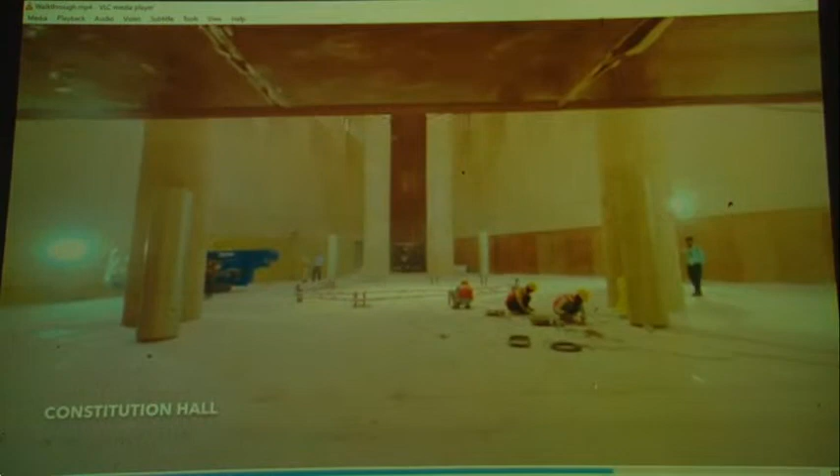Once you enter, here we have followed the theme of the lotus, which is the national flower, whether it is the false ceiling, the design, the jalis, etc. Then we come to the constitutional hall.

This walkthrough was taken when the construction was on. We were doing the finishing touches.

This is the MP lobby where MPs will sit, like in an airport lounge. They will sit here. It is a central courtyard. There were trees, so we have kept the trees.

This is the Gandhi statue in the old Parliament building, and this is the view from the old Parliament building. At night there is some facade lighting which will give this look.

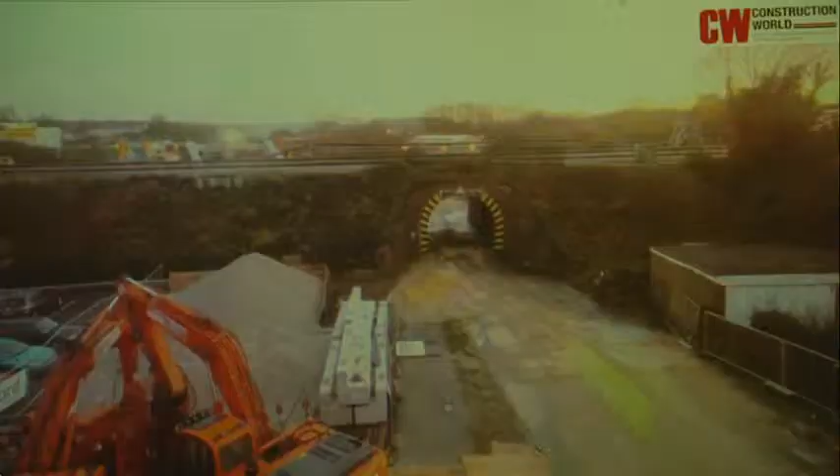So much has changed in our country in the last 100 years. We were able to break free of British rule, but some things they left behind stuck with us. Our Parliament building is one such legacy. The British designed the structure, the British laid the foundation, and the British inaugurated the building.

Now the central government has announced the construction of a new Parliament building, which the government says will honor India's cultural diversity and its journey to becoming the largest democracy in the world.

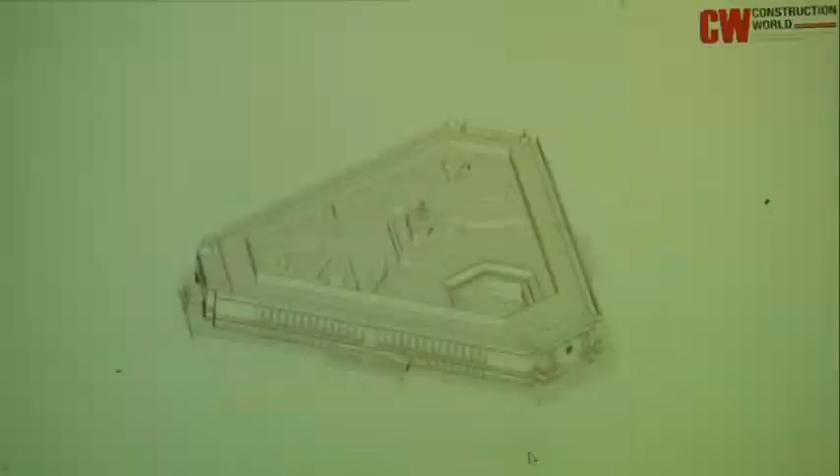The new Parliament building will be a triangular structure spanning an area of 64,500 square meters. A special feature is the Grand Constitution Hall, showcasing India's heritage and cultural diversity. This hall is said to honor the works of Indian artisans and sculptors as a symbol of Atmanirbhar Bharat, the new slogan of self-reliance from this government.

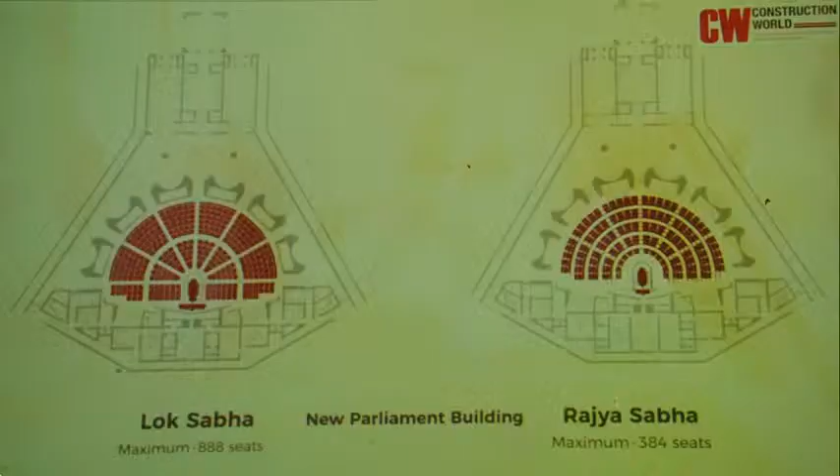A significant part of the change has been the growth in India's population, raising questions about adequate political representation. The seating of the new Parliament building has increased 1.5 times compared to the old building. Between the two halls, the building has a seating capacity of 1,272 MPs: 888 in the lower house, the Lok Sabha, and 384 in the upper house, the Rajya Sabha.

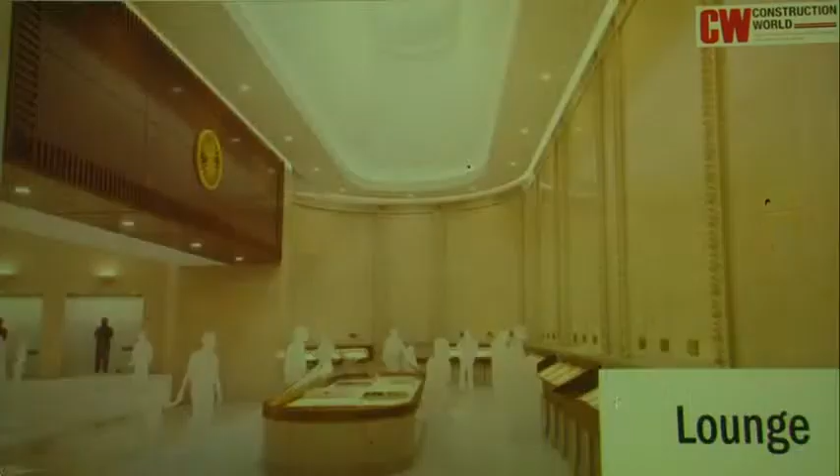The building will house lush amenities for the political representatives: a lounge, a library, multiple committee rooms, a dining area, and lots of parking space. The new building will not have a central hall like the old building, a feature that maximizes space.

As you would expect, the new Parliament building is eco-friendly and green. It is projected to consume 30% less electricity.

The project is in the hands of Tata Projects Limited and is estimated to cost 862 crore rupees. Tata won the bid and will build the new structure over the next year and a half, 21 months to be exact, with completion expected by July 2022, the year of India's Platinum Jubilee as the young independent nation turns 75.

On 10th December 2020, Prime Minister Narendra Modi laid the foundation stone for the project. With the groundbreaking ceremony, or Bhumi Pujan, the ritual to honor the land of construction, the building still needs court sanction before construction begins. This is the question we asked, and I am going to answer this.

This is a very important project for the country, the first Parliament building to be constructed in independent India, and it's a national emblem.

When we bid for this project, we bid a very aggressive price, and by the grace of God we became L1 and won the tender. We are very much confident that we will be able to complete this project on time with the required quality and safety. We feel proud to be associated with this project, both as a company and as an individual.

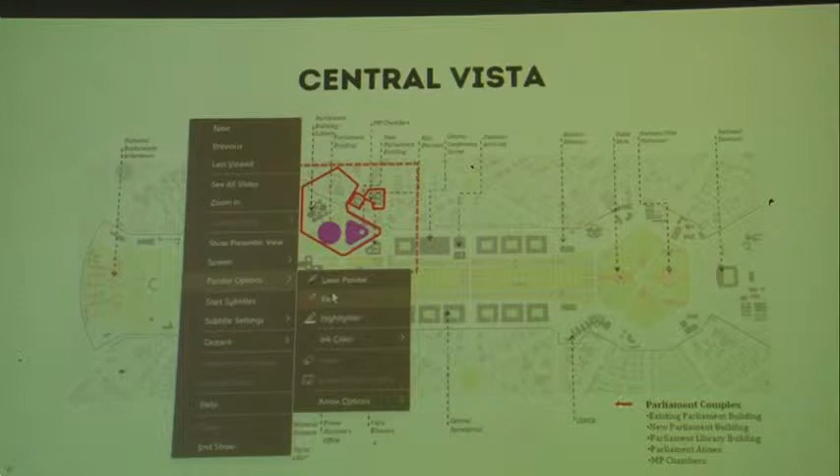Can you please switch off the light? Are you able to see my pointer? So this is, if you see this triangle, this is the project.

If you can see the entire development, our project is hardly 3 to 4 percent of the entire footprint. But there is a lot more, because this is a very ambitious plan of our Honorable Prime Minister. It's about 15,000 crores of estimated complete development, which has been designed by HCP, Hasmukh C. Patel, a design consultancy from Ahmedabad. Mr. Bimal Patel is leading that group. This is called the Central Vista plot.

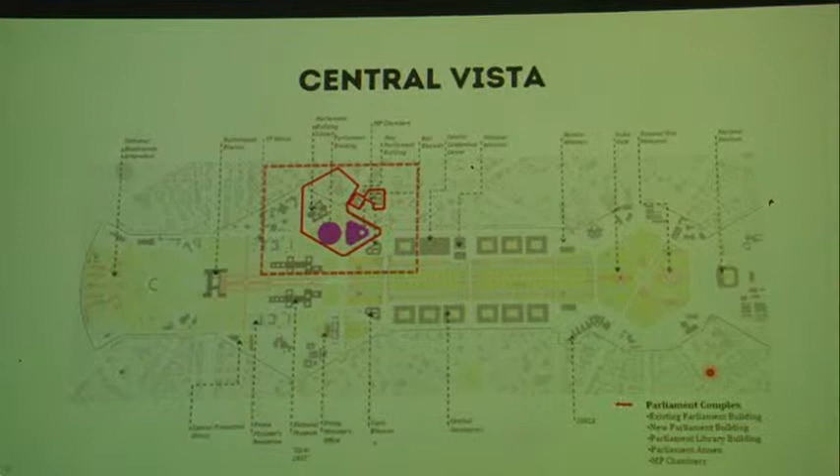This is the Parliament Library, this is the old Parliament, this is the new Parliament, and these are the different buildings that are going to come, some of which are already ongoing. About 4 or 5 projects have already started, including the Vice President's Bungalow, the Common Central Secretariat, and the Executive Enclave which has the Prime Minister's office and residence. Kartavya Path is also part of Central Vista, and that has been completed. We, as Tata Projects, are doing only the Parliament building.

I have a video for this also, which I'm going to play here.

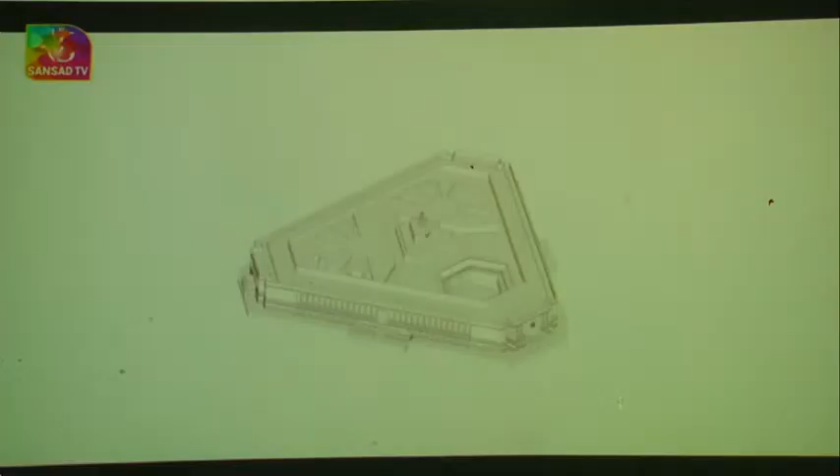संसद का नया भवन पुराने भवन से 17,000 वर्ग मीटर बड़ा है। संसद के नए भवन को 64,500 वर्ग मीटर क्षेत्र में बनाया गया है। संसद के 4 मंजिला भवन में मंत्रियों और पार्टियों का अपना अलग कमरा होगा। संसद का नया भवन टाटा प्रोजेक्ट लिमिटेड ने बनाया है। संसद का नया भवन पूर्ण रूप से भूकंप रोधी है, जिसका डिजाइन HCP डिजाइन प्लानिंग एंड मैनेजमेंट प्राइवेट लिमिटेड ने तैयार किया है। इसके आर्किटेक्ट विमल पटेल हैं।

So the reason for showing this video is just to compare old and new, and why we require the new parliament, because the question comes, especially from the opposition, why we are constructing this. So you must know today, after this session, why the new parliament is required.

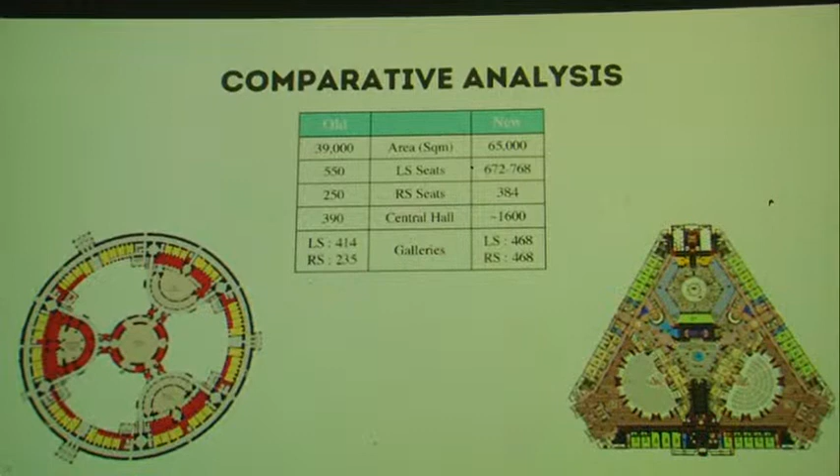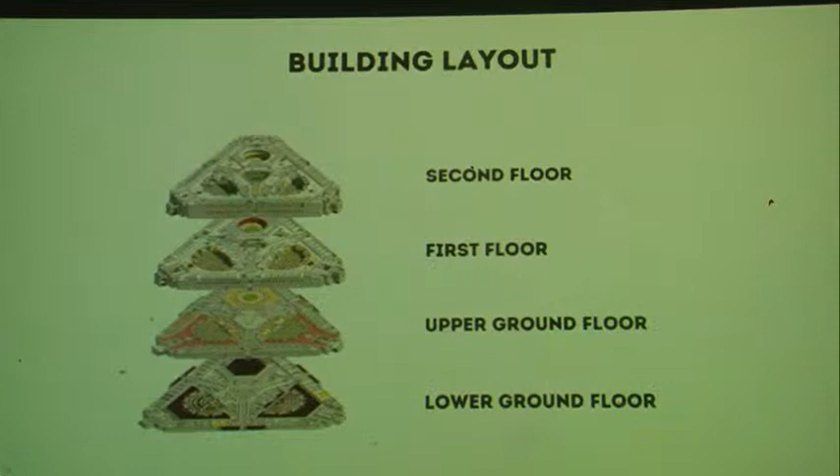The benefit of using 3D is that since all the activities are there - firefighting pipe, electrical cables, tray, HVAC duct - you can develop LOD, levels of detail. The basic detail starts from LOD 200, which is a basic architectural drawing, and then you further develop it. We have developed up to LOD 400, wherein we can incorporate all the as-built drawings also. So when the as-built drawings are being incorporated, you can do clash detection. If some duct is crossing or intersecting through the cable tray, or some pipe is going through the duct, all those things are detected here, and it has been rectified at the drawing table only instead of at site.

So this is the Lok Sabha. As you have seen in the video, this false ceiling, which is hanged, is like a mezzanine floor. Above this, where the false ceiling is hanged, it is almost 350 metric tons of structural steel work hanging from the slab, and this is a 22 meter span with no column in between. So the beam depth was up to 6 meters.

So when the people were tying the reinforcement, they were entering - we were also going to check the reinforcement under the beam. So with that, we have done this. The formwork was erected for the slab, and the same formwork was used for this false ceiling also.

So, unique features - you can see the Ashok Chakra. It is a paperless parliament. You can see there are multimedia units in front of every member of parliament, so there will not be any paper, there will not be any file, there will not be anything. In this multimedia unit, they can vote, they can choose their language, they can browse, they can see the document - anything they can do.

Then this motif carpet, which is there, it is a hand-woven carpet, which was done in Mirzapur - you would have seen that web series Mirzapur, it is the same place where this carpet was made. Then engraved furniture - this furniture is completely engraved within the veneer. Peacock jalis - all these jalis you can see, there are 6 jalis, and all the 6 jalis have peacocks in different positions. And the green marble wall - you can see in the United Nations whenever there is a green marble wall, the same green marble, Baroda green marble, has been used here. It is basically Udaipur green.

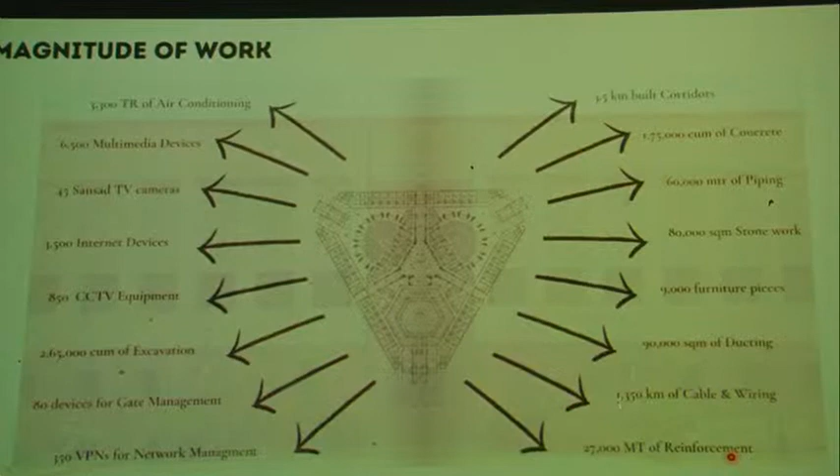This is a very important slide. There is 3,300 tons of load for air conditioning, 6,500 multimedia devices, 45 Sansad TV cameras, 3,500 internet devices, 850 CCTV equipment, 265,000 cubic meters of excavation, and 80 devices of gate management. There is gate management with tyre busters, and automatic bollards, which come up automatically in case of any terrorist attack to puncture the tire immediately. There are also 350 VPNs for network management.

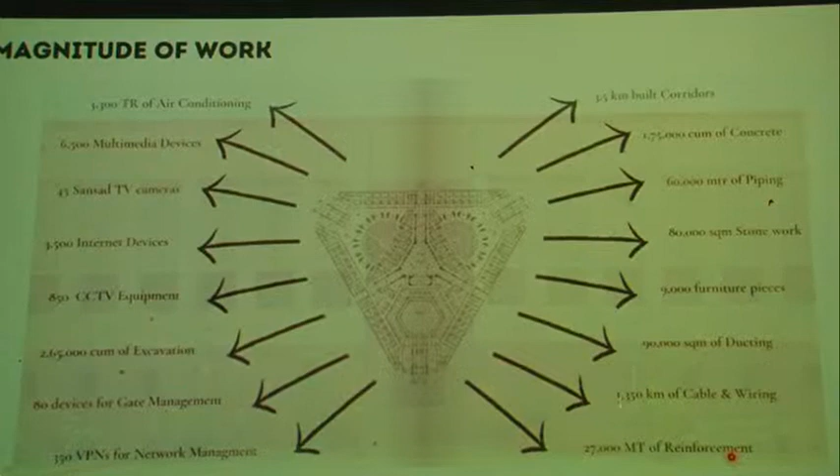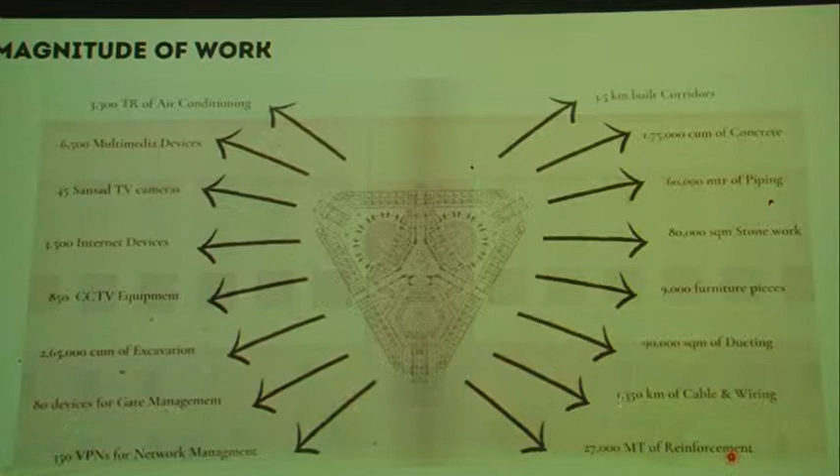27,000 metric tons of reinforcement has been used in this building, 1,350 kilometers of cable and wiring, 90,000 square meters of ducting for HVAC, 9,000 furniture pieces, 80,000 square meters of stone work, 60,000 meters of piping, almost 60 kilometers, 1,75,000 cubic meters of concrete, and 3.5 kilometers of built-in corridor.

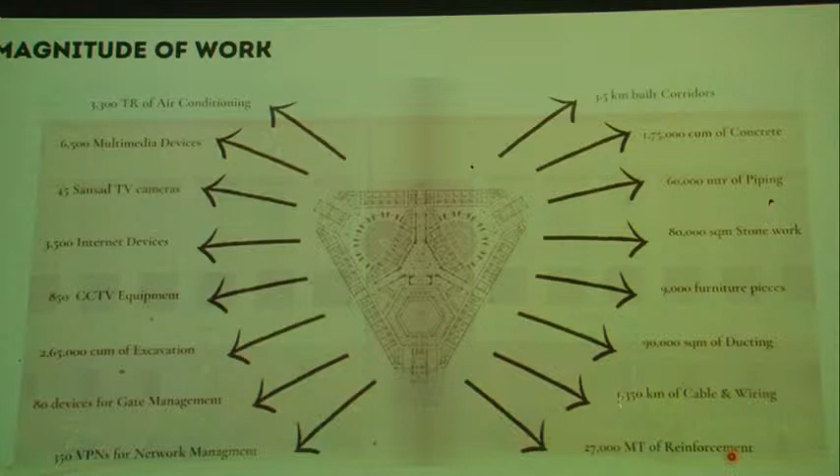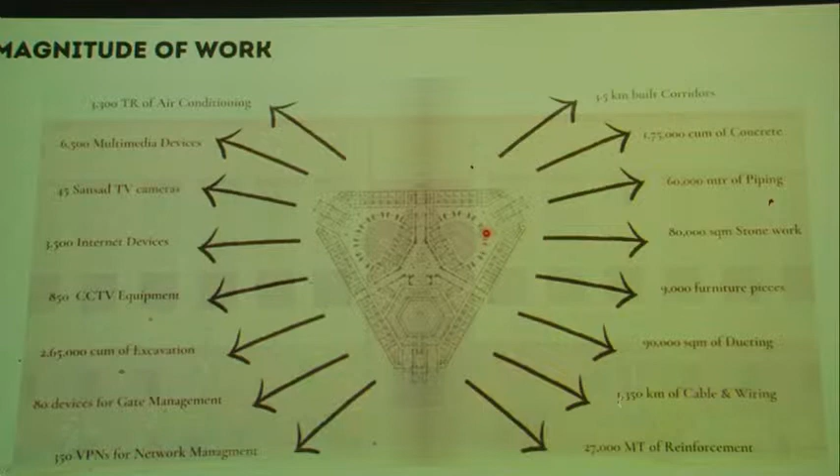Whatever corridor you are seeing here, if you go inside and enter, you will be lost. You will not be able to know from where to come out, it's like Jantar Mantar. This corridor is 3.5 kilometers, it's a Y-shaped corridor, and these are the corridors near the minister's offices.

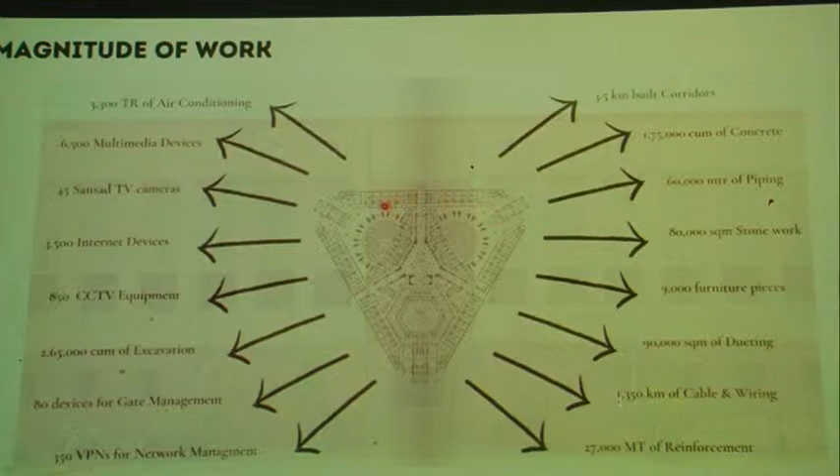So what were all the challenges? First of all, this is the old parliament building, and this is the new parliament building construction site. We had to ensure sessions continued, and we couldn't stop the parliament from running, because we had to complete the work in 2.5 years.

So we erected a 10-meter height barricade with a sound barrier. It can absorb up to 50 decibels of sound, so whatever construction is happening will be resisted and the sound will not come through to this side. A 50 mm sheet has been used for noise resistance.

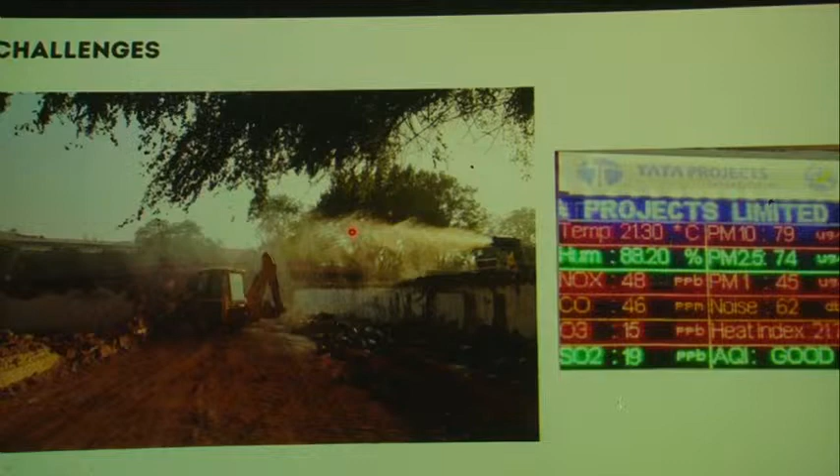Construction is always prone to pollution, lots of dust, lots of concreting, lots of noise. But we captured this using mist sprays and smog guns, which spray water so that whatever dust comes out because of construction settles down. We monitored the AQI in real-time in front of the site, and these parameters were better than Delhi's. So the AQI here was good, while in Delhi it was severe.

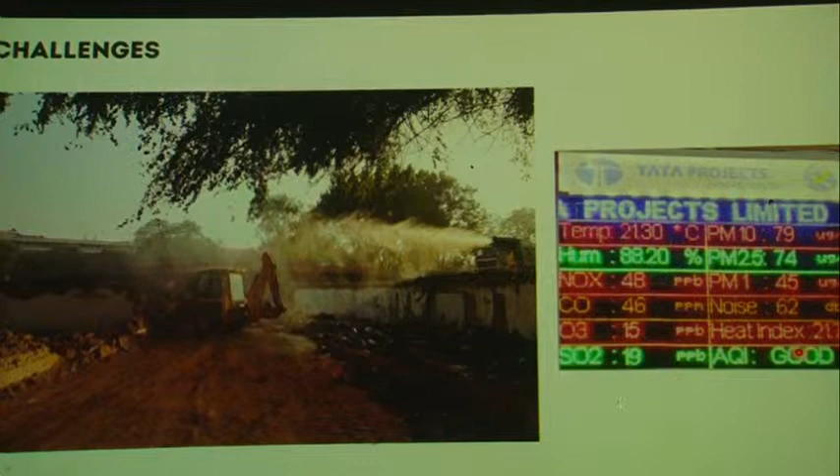Then there was excavation, 2,65,000 cubic meters, and this earth had to be dumped somewhere. Excavation itself is an easy activity, but transporting this earth and storing it somewhere was a Herculean task, especially in the VIP area. All BS6 dumpers were used, since the tippers that generally carry earth weren't available, so we mobilized almost 70-80 trucks from Gujarat and all over India for transporting this earth.

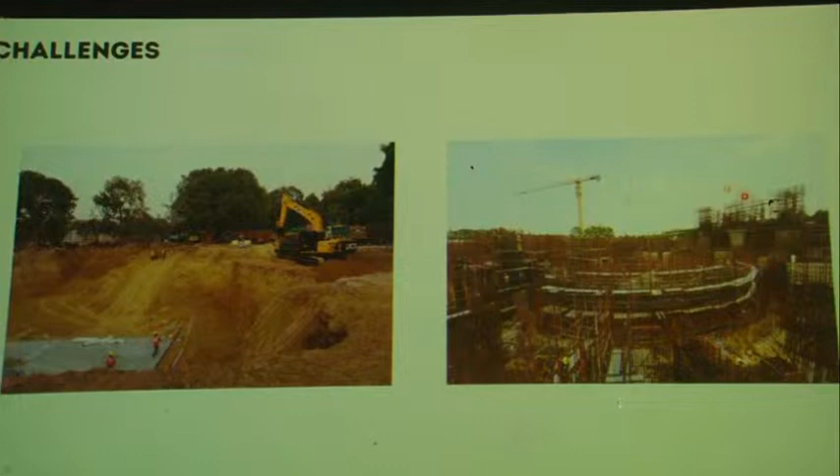This is the complexity, showing how much staging and scaffolding was erected for the work. I will show you one very interesting time-lapse video which will show you how the construction took place. I am making this presentation more interesting by embedding some videos, which will give you better insight into the project.

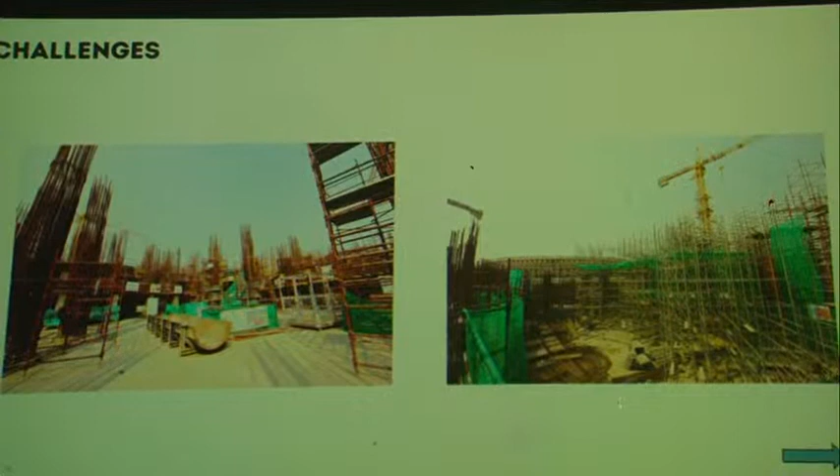The stone was the major challenge, because this much stone with this quality - how to bring it, how to place it, how to cut it, how to process it - was really a Herculean task. We did a lot of work here. Lot of work. You can see that we have visited quarries.

This is the picture, you can see me. I have personally visited each and every quarry. I spent around one month in Rajasthan, and we hunted all the quarries, all the processing units. Today we are in a position to complete this entire masterpiece.

It's a 20 minute video, but I will shorten it whenever there is a discussion. You can see how this stone work has been accomplished. It is a very, very insightful video.

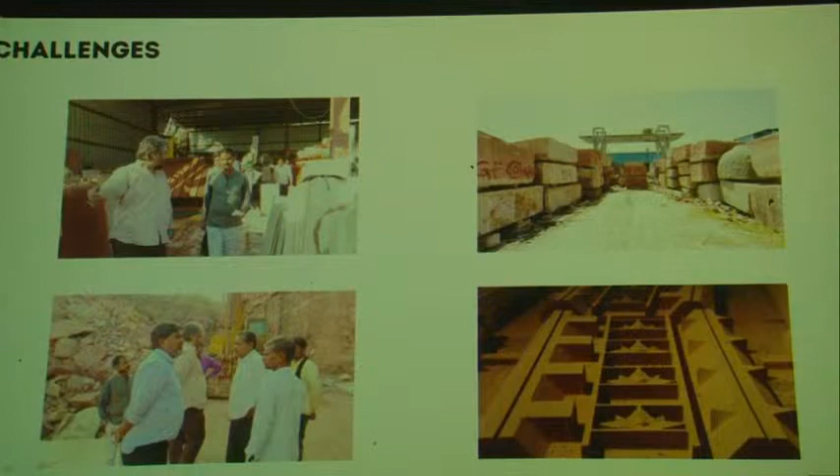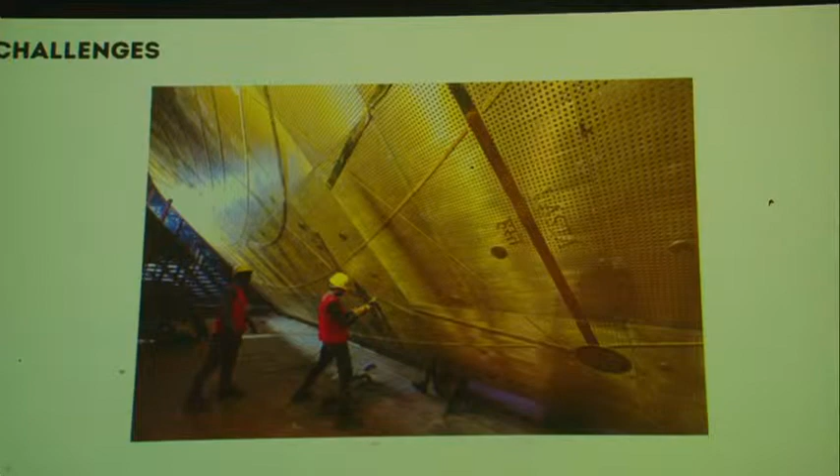This is the false ceiling which I showed you. This false ceiling is resting on this. This is the Constitutional Hall, where I said there is a brass false ceiling.

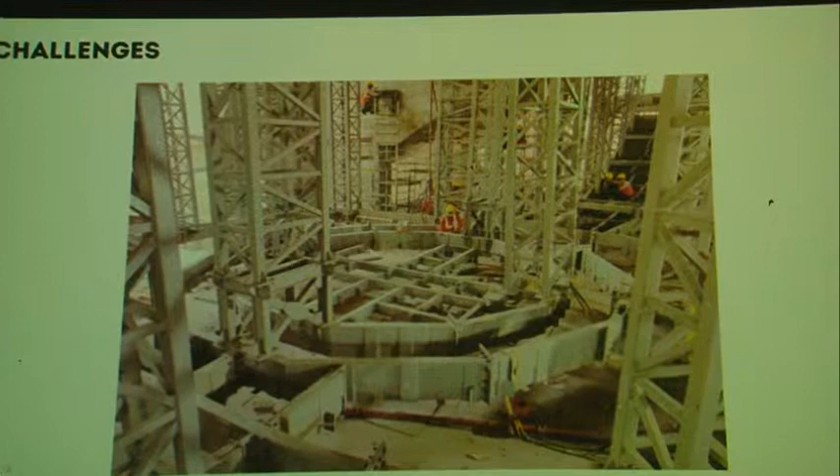This is the structure which is behind this. It is not visible, but we know because we have done 350 metric tons of structural steel which is carrying this false ceiling. People can walk and do any maintenance here without affecting anything, even when the station is all on.

This is the stone, Makrana marble, which is the pendulum, and it is a dial gauge.

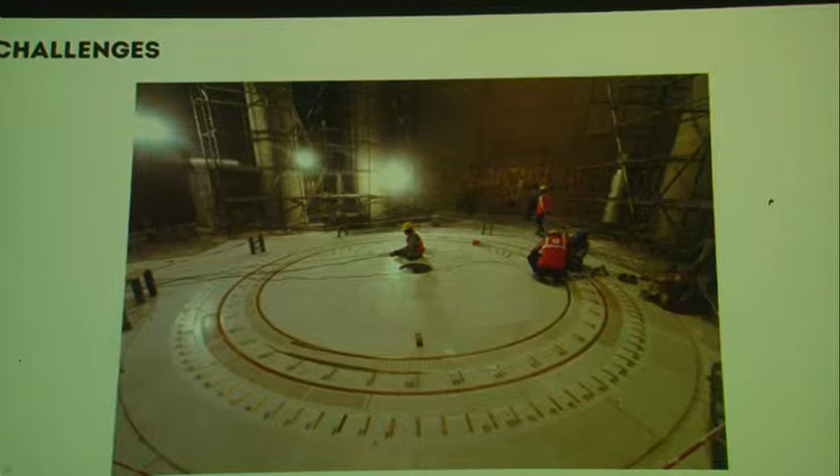We also faced the COVID second wave. At that time, we maintained all social distancing with the people. 2,000 people were working, and we gave them proper sanitation, proper COVID protocol, and vaccination. We also provided an isolation ward for them with proper full-time medical oxygen concentrator.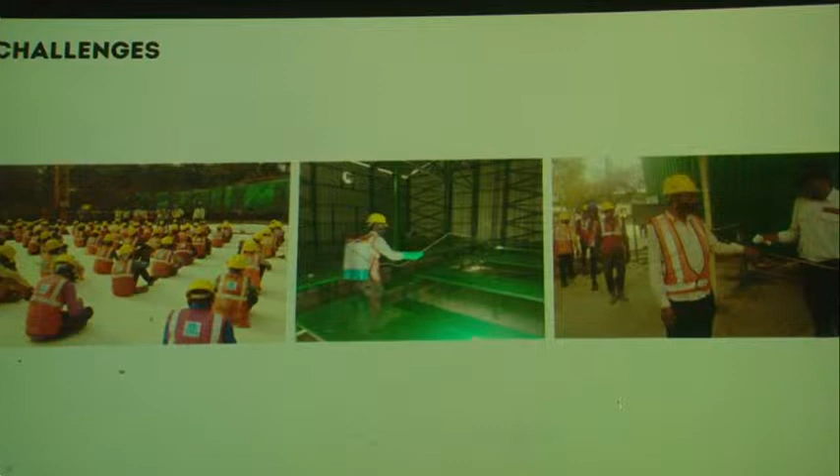At that time, vaccination was very costly in the earlier phases. I paid 550 rupees per vaccination per laborer, but we made sure there were minimal COVID cases. There were some cases, but we were monitoring and quarantining the people from time to time.

These are some important events, when Mr. Tata came for the Bhumi Pujan. Our group chairman, Mr. N. Chandrasekaran, also came 2-3 times to the project.

The Prime Minister would come to the project from time to time, monitoring and talking to the laborers. I never got a chance to speak to him, though I was involved, but he was always encouraging that he should talk to the Shramjeevis.

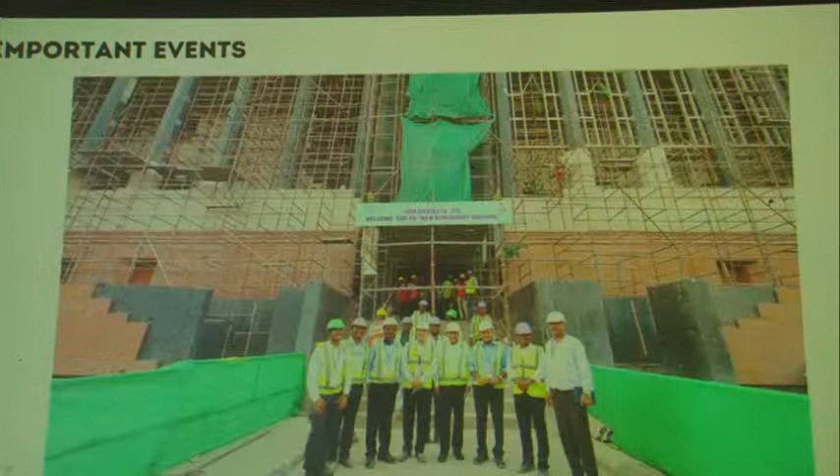This was our group chairman and managing director who came. These are some glimpses of when all the people, all the engineers, were celebrating.

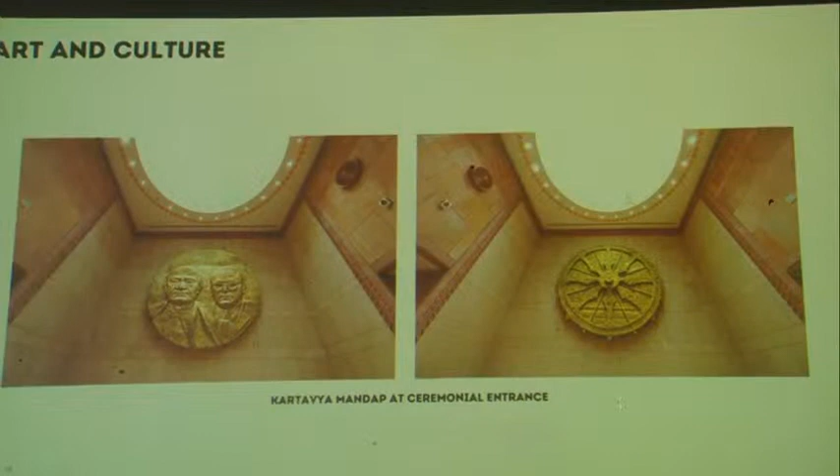endurance, courage and dynamism. These are some Kartavya Mandap at the ceremonial entrance. There are 3 ceremonial entrances, and at every ceremonial entrance there are Sankalp Mandap, Kartavya Mandap, and Gyan Mandap is also there. There are 3 ceremonial entrances. These are Shilpa Dirgha - you can see everywhere,